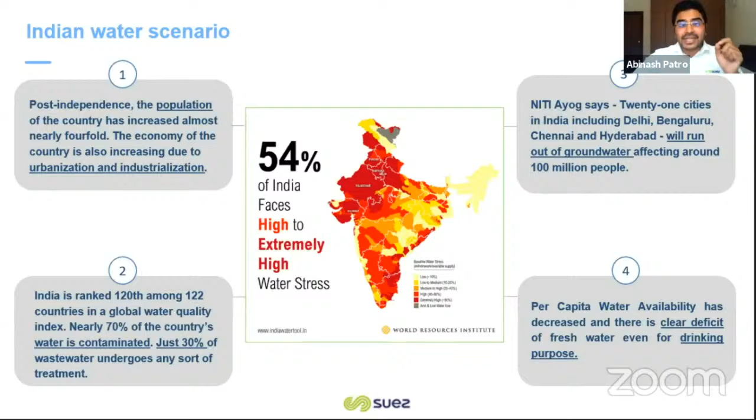Okay. And as a company, ladies and gentlemen, what we are doing. So our only and single purpose globally is to shape a sustainable environment now. We want to solve these water challenges globally. We are helping our industries, cities, and urbanization sector to solve these challenges. This is our clear purpose. How we are doing this. This is very important. From last 162 years, we have been doing this. We have been working with cities and industries. These are the three important pillars.

We are helping cities to reduce the water footprint. What we are telling, this much water is not required for the intake. So we have to reduce the fresh water intake by optimizing the process, by adopting advanced technology, by adopting digital technology. Second is, we all together have to adopt integrated water management, be it water treatment, effluent treatment, recycle, zero liquid discharge. So we all have to adopt this so that we don't take fresh water. Once only we take fresh water. Second, we have to keep on reusing this fresh water so that we save fresh water for drinking purpose.

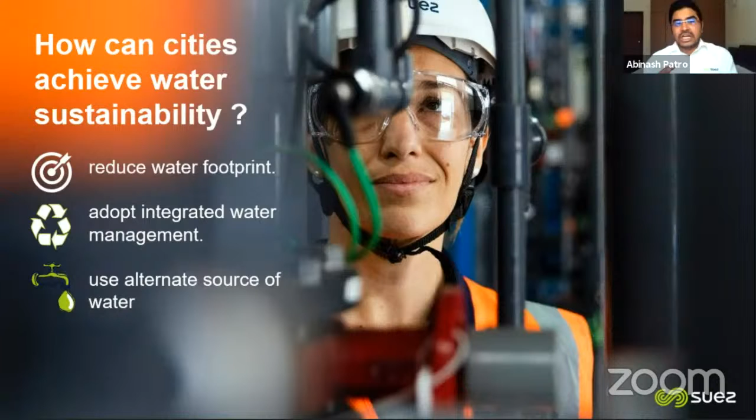And third, most important, everyone, we all have to create alternate source of water. Yes, you heard it right. We have to create alternate source of water. How? By treating and reusing sewage water, which we all generate. Second, by reusing industrial wastewater. And third is by converting seawater into fresh water. So these are the three things which we all have to do. And today we are going to discuss creating alternate source of water for all of you through decentralized sewage treatment plant. So this is very important.

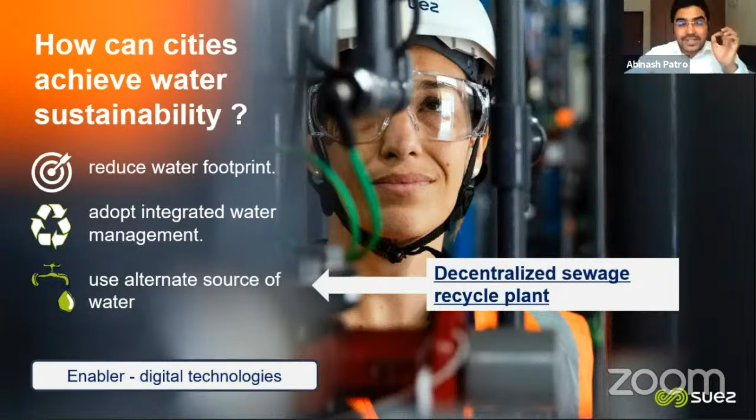And all this has to be supported by digital technology, which is going to improve the efficiency and effectiveness of the plant. As Suez, end of the day, we want every one of you to win, because when our customers win, we win. So with our expertise, with our global knowledge, with our localized skills, we want everyone to win over these water challenges.

We are a 162-year-old company, ladies and gentlemen, started in 1858 with Suez Canal inauguration, and there have been many revolutions like the hygiene and public health revolution, urban comfort revolution, and now the resource revolution. This is all about reduce, reuse, and recycle. So we as a company, a global leader in environment services, are helping to solve these resource revolution challenges.

Okay, globally, we are a group of 90,000 passionate employees working toward a single cause to solve these water challenges globally. You can see turnover more than 18 billion euro globally. And this is what we are really proud about, the trust of the customer. More than 450,000 customers globally trusted our capability, trusted our people expertise to help all of you. And more than 120 million euro in R&D we are investing so that we develop advanced technology to help all of you.

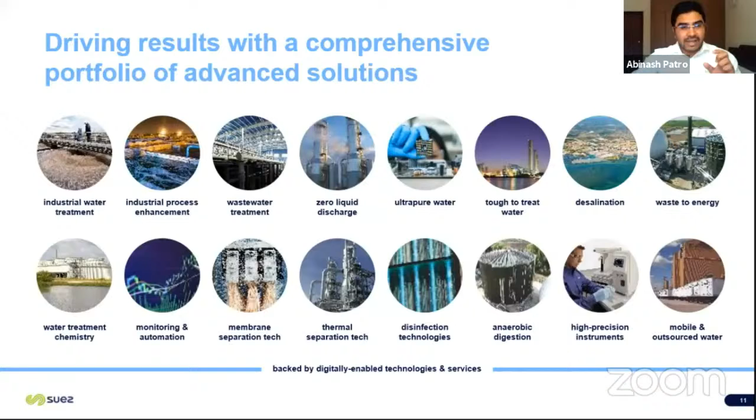So this is the range of technology. Today we are going to discuss specifically membrane bioreactor technology, but be it water treatment, zero liquid discharge for industries, for municipal corporations, we have a range of technology, but today very specifically on MBR we are going to discuss. Very important for success of any plant or any solution is this unique integrated offering. With Suez, ladies and gentlemen, we manufacture our own product. We can provide the complete solution. We manufacture our own chemicals in our factory, and we are leading globally in digital technologies also, with services and support to all our customers. So this unique integrated offering with Suez, you all will get.

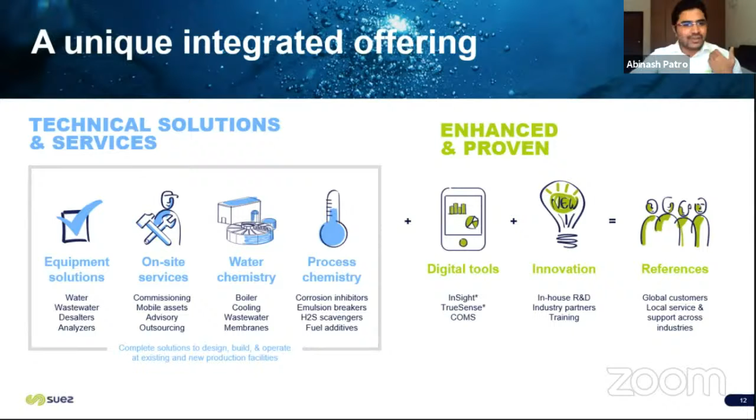So this is important. In India, we are a leader in providing water and wastewater. More than 1,500 people working from India for the last 40 years. And we have a center of excellence and engineering excellence in India, a technology center to develop some of the innovative technology, and a digital center, everything in India.

So India is a hub where we are driving all this water and treatment technology. And in line with the Make in India initiative, we have had a manufacturing facility since 2009, ladies and gentlemen, where we are manufacturing world-class reverse osmosis membranes and specialty chemicals, and all these chemicals we are also importing and exporting outside India. This is very important.

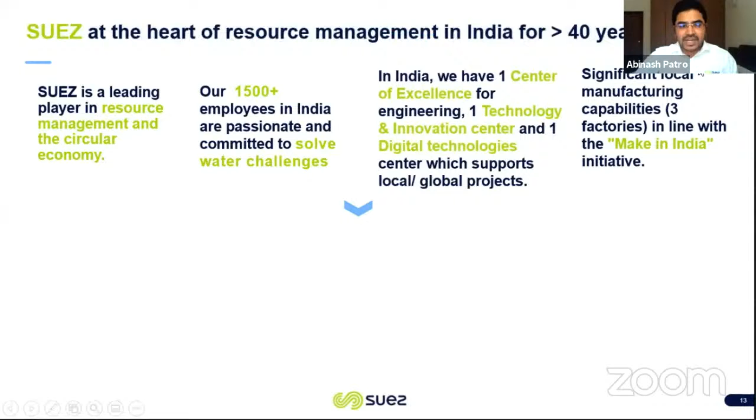So be it municipal corporations, we are connected with them, providing large sewage treatment and large water treatment plants. And today, like what we have discussed, the urban sector, like all of you, the plumbing community, the consultant community, the architect community, where we are providing sewage recycle solutions for all these sectors. And one success factor which I want to highlight here, why we are so successful in India on this sewage recycle, is because we believe in minimum and tighter reuse standards, the plant which can provide this quality of water consistently. So this is why we are more successful, and Raja is going to discuss more on this technology, how we are achieving this.

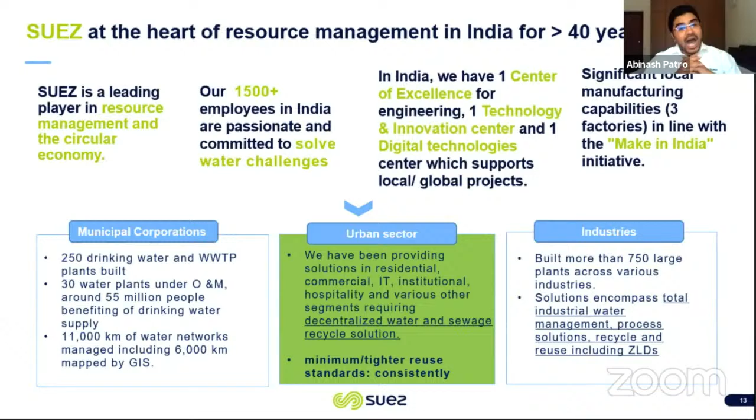And third, industry: we have more than 750 plants across industries treating tough-to-treat wastewater, and zero liquid discharge solutions. So this is, in a nutshell, ladies and gentlemen, about Suez and how we are helping all of our customers in solving these challenges.

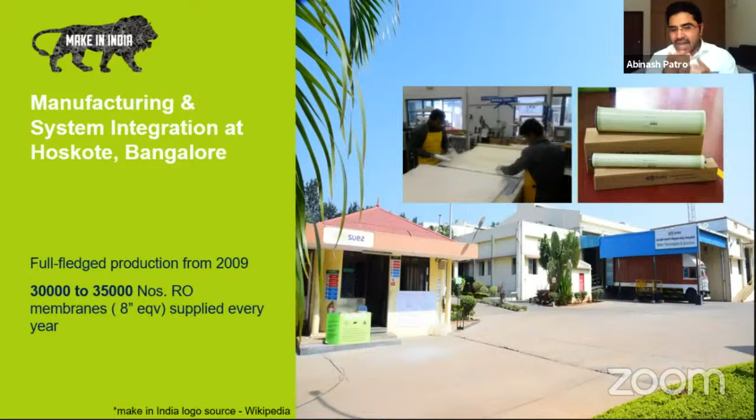Now over to my colleague, Mr. Rajasekaran, to take us through. This is the manufacturing facility which I mentioned, the Make in India plant at Hoskote. If you want to visit this plant, I welcome all of you so that you see how we are manufacturing this technology. So over to Raja to take us through this important and very innovative technology, that is membrane bioreactor. Over to Raja.

Yeah, thank you, Abinash. Thank you for your wonderful session about Suez and about recycle. So today I'm going to talk about what is meant by recycle, why we have to do that, what is the success of the recycle, what advantage we are going to get if we do that, and what Suez can offer to you all. So this is what I'm going to talk about today.

So recycle means, if you start getting consistent outlet water quality and consistent outlet flow, whatever sewage is being generated, and if you're getting it consistently, you are able to reuse it. That is what makes recycling successful in any plant.

So in India today, you can see that sewage treatment plants are available everywhere. But most of the plants are not adequately treating the entire flow which is getting generated, and they are also not generating the required water quality for reuse. Today we are going to talk about how we can help India reuse this entire sewage for reuse applications. Let's go to the next slide here.

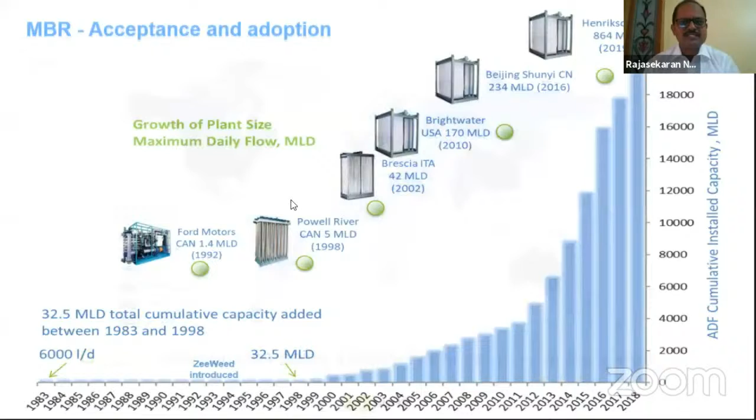So today I'm going to talk about a specific technology called MBR. MBR means membrane bioreactor. This is the most advanced technology as far as any sewage water treatment is concerned. You would have seen most of the conventional systems, but MBR is the most advanced technology system and the most reliable process. We started this MBR way back in 1983, with 6,000 liters per day, and from there the journey started.

There is a company called Zenon from Canada that actually started this first MBR, these membranes. And then slowly these MBR membranes have been adopted over a period of time, and you can see that now, in 2019 and 2020, we can talk about more than 20,000 MLD of water being treated with MBR technology and with Suez MBR membranes. So you can see how it has evolved.

So why has it evolved, why has the technology been accepted? The main reason is the reuse application: it has been consistently giving excellent water quality, and it has been proven over a period of time. It's one of the best technologies as far as any recycle plant is concerned. Let's go to the next slide here.

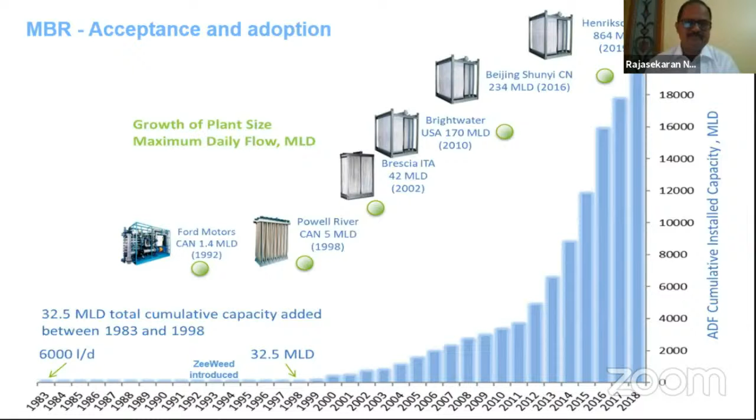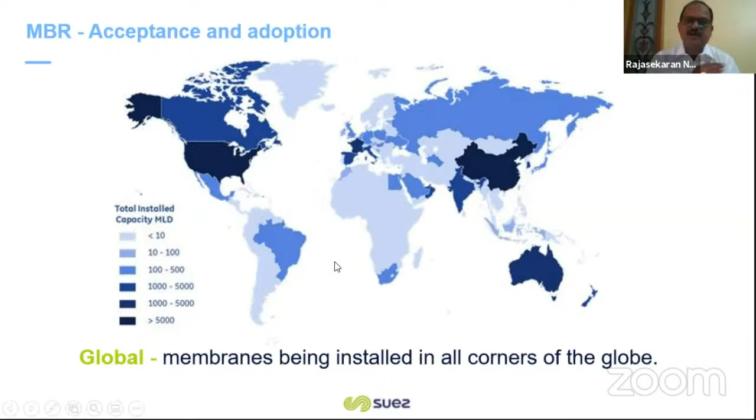What is the next? Yeah.

So now we'll talk about India operations. In India, we started our first MBR installation in 2004 at Cubbon Park, Bangalore. This is around a 1.5 MLD plant, and anybody can visit this plant and see it. The entire water has been treated and used for construction of the building, and completely used for gardening and washing, and other reuse applications.

So we started in 2004 in India. Now we have more than 800 installations across India, from 5 KLD up to 45 MLD or 50 MLD, plants which have been successfully running for the last 16 to 17 years. Moreover, the installed capacity of more than 225 MLD has been installed in India. That means across India and across various segments, this MBR technology has been adopted.

And in MBR technologies, Suez is a pioneer in making these MBR membranes, as Abinash mentioned. We have a market share of more than 70%. If somebody thinks about recycling, the best technology is MBR, and if it is MBR, then what comes to mind is Suez technology. Thanks for all your support, trust and faith in the company, and we will continue to support. This is a very beautiful product, and it's been technically proven. Every day we keep improving the product from the Suez side.

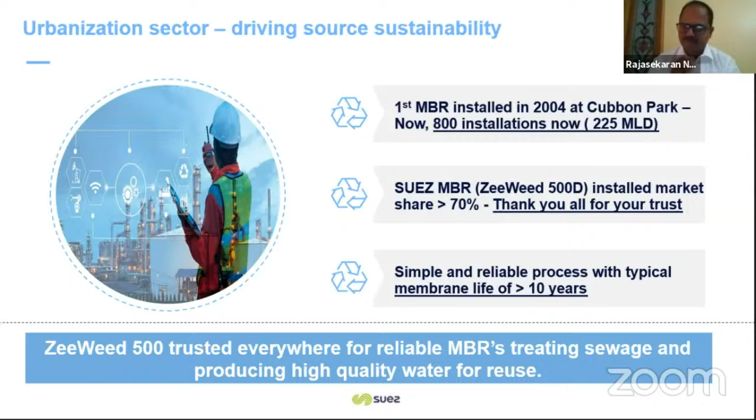Now we'll talk a little bit about the technicality, how this MBR process works, and how it is useful for reuse applications. MBR means membrane bioreactor. It is a combination of your conventional biological process and a membrane filtration process. The advantage of combining both is that you can increase the MLSS concentration up to 8,000 to 12,000 milligrams per liter, whereas in a conventional system you cannot increase it beyond 4,000 to 5,000. Otherwise, you will have a lot of issues in the settling process.

But once you do this, the membrane acts as a barrier, and you will get a consistent outlet water quality which can be completely reused for all your non-potable applications. Except drinking and bathing, this water can be completely used. It's a very simple process. Once you take out the clear water, the rest of the water goes back to your bioreactor tank. And not only in the STP segment, but in effluent treatment plants also, in most places we have utilized the same technology.

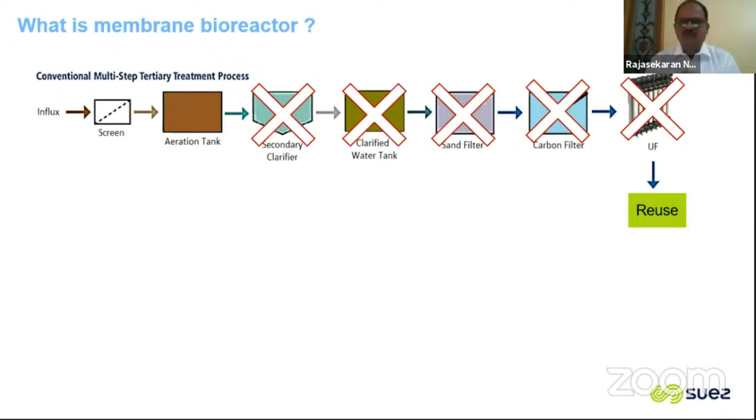A small way of explaining the conventional process versus the MBR process. In the conventional process, you have a screen, aeration process, secondary clarifier, then the clarifier water tank, then sand filter, carbon filter, and ultrafiltration to get reuse water quality. But with MBR, we don't require the secondary clarifier, the clarifier water tank, sand filter, carbon filter, nothing. You can remove your ultrafiltration also. You only use the aeration process and then your membrane tank. The membrane can be fitted into the same aeration tank, or kept in a separate membrane tank.

So you can just see this process itself, how many processes we have eliminated, which is not only adding the cost, but also contributing a lot of space, right? And also during the operation we have to maintain all the equipment, right? But whereas when it comes to the MBR, it's a very simple, reliable process, and more than that, you will get consistently high water quality.

What we have seen in most of the places, more than 800 plants right now, in the entire 800 plants, 99.99% of the time you get less than 5 ppm BOD. Whereas in the conventional process, it all depends on the operator, how the operator is operating the plant. If an excellent, technically skilled operator does it, then they will get the parameter. Otherwise, sometimes the parameter goes more than the limit.

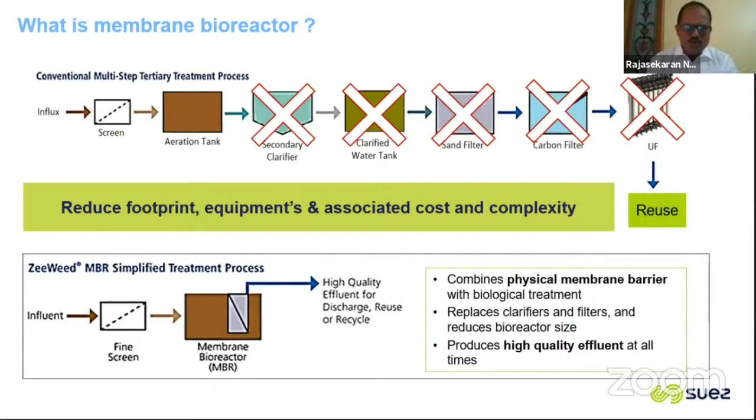Whereas as far as the MBR process is concerned, at any point of time, that's what I talked about, it acts as a barrier. It's like a jail, actually. The TSS or turbidity or the bad water quality will not come out of your membranes. It controls everything. Okay, so this has been proven. We can see how this process has been done.

For the pre-treatment, we require a bar screen and oil skimmer, then equalization tank, then fine screen. The fine screen is one thing we normally recommend, especially because human hair or a blade or some sharp-edged material can come and cut the membrane. So ideally a 2 mm punch hole fine screen is required. And then after that, it comes to the biological process.

The biological process is a combination of your anoxic and aerobic process. Anoxic removes the complete nitrogen from your sewage water, and the aerobic process removes all the BOD, COD, all the organic particles from the system. Then it goes to membrane filtration. The membranes suck only the clear water, and the excess dirty water stays in the same biological process, so that you get only the clear water.

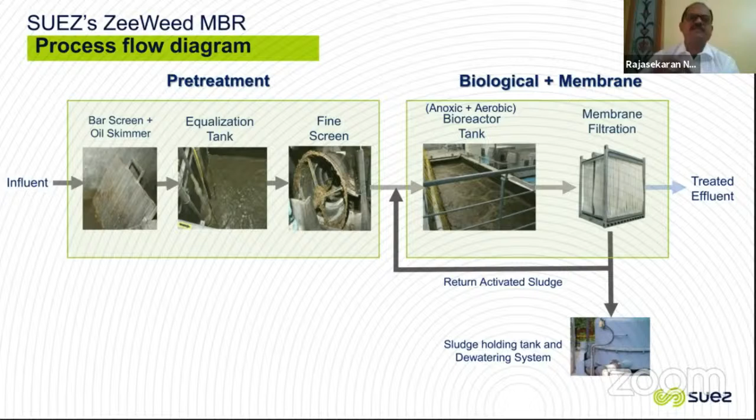And one of the biggest advantages of this process is that you will get a recovery of more than 99% of the water. For example, if you feed 100 KLD of water, you will get 99 KLD of treated water. Only 1% goes to waste, probably to the sludge handling system or something. But otherwise, these systems have a recovery of more than 99%. That is fantastic when compared to conventional at 90% or 85%. What is the next one?

Yeah. So now, especially with the urbanization we talked about, right? In urbanization, space becomes very, very critical. Be it your residential complex, your hospital, the hotel industry, or even the IT industries. Day by day, the cost of land goes up like anything. But at the same time, as a water treatment company, a technology product, we have to save space for the customers, right?

So that means any existing conventional system can easily be retrofitted to up to 3x capacity. For example, in India, a 300 KLD STP plant we have converted to a 1 MLD plant, that means a 1000 KLD plant. That means the capacity has been increased 3 times. In some cases it's been increased up to four times. So this is fantastic as far as recycle applications are concerned.

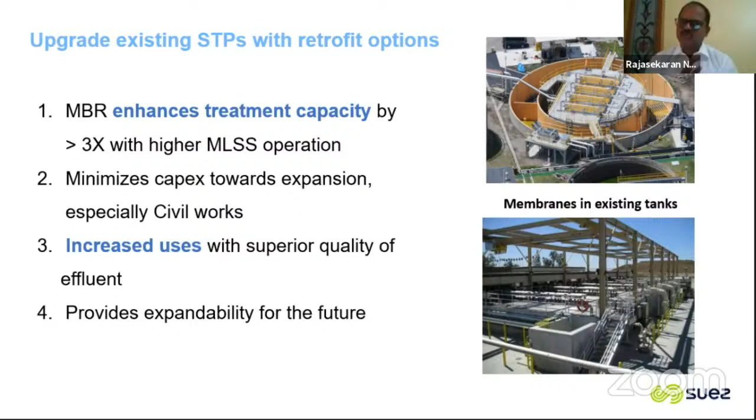And when you increase the capacity, you don't need to increase your civil cost. So that means overall capex can be reduced, and also high water quality, so that the entire water will be reused for complete applications. So that's what I talk about. This is one of the best technologies for sewage treatment applications available in the world right now. And in MBR, Suez leads with more than 70% of the market.

So now we can talk about what outlet water quality we can get. Normally we go with either PCB norms or NGT norms, right? The NGT norm says BOD less than 10 ppm, whereas our MBR can produce less than 5 ppm. That means this is much better than the government norms. Not only BOD, COD 50 versus 30 will be provided, and TSS less than 2, 99.9% of the time our MBR produces.

And total nitrogen, phosphorus, take any parameter, MBR produces very high quality water. And this water can be absolutely used for your car wash, cooling tower makeup, your fire hydrant, and even gardening or toilet flushing. Everywhere the MBR is installed, 100% of the water is being utilized across India. Okay.

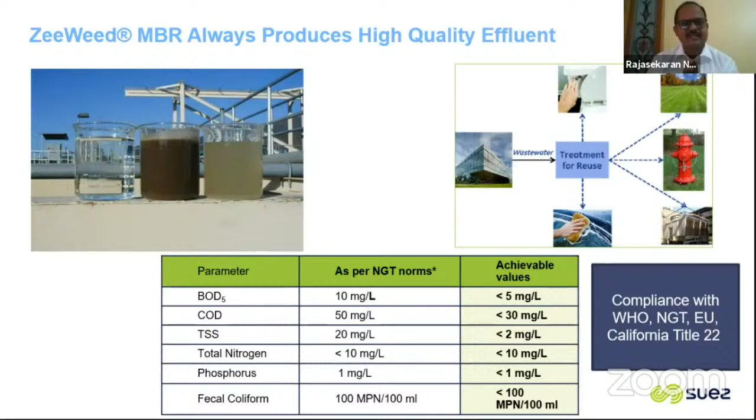Okay. Now, why Suez MBR? I talked about more than 70% of the market share, right? So Suez makes patented reinforced fiber. This is our own patent. It's not only the fiber but also the potting technology. This is very important in terms of performance, the life of the membrane, and also the water quality. And we also use one of the best chemistries called PVDF, polyvinylidene fluoride chemistry. This is the best polymer available in the world to make MBR fibers.

And also we use the out-to-in technology, so that the membrane will not get fouled, and it can operate in a wide range of pH, from 1 pH up to 10 pH. And the nominal pore size is 0.04 micron. What does 0.04 micron mean? It removes all bacteria, virus, turbidity, and protozoa completely. So it's virus-free water. Without any further treatment, this water can be used for all non-potable applications except bathing and drinking.

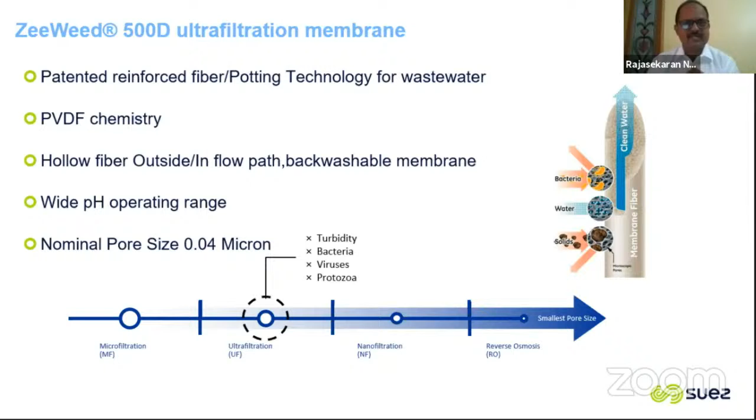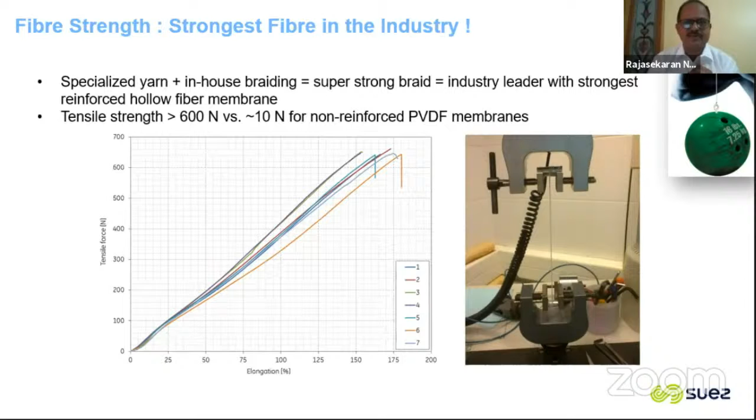What's the next one? This fiber is one of the strongest fibers. We make this fiber in Hungary, in Europe, and our factory is the world's biggest factory manufacturing hollow fiber membranes. And the strength we talk about is one of the best in the industry. It can handle more than 600 newtons versus conventional non-reinforced PVDF of 10.

And now we'll talk about the new introduction. Around 2 to 3 years ago, we introduced a new model called 500S. In other words, we call it 500 ZeeBlok membranes. Earlier, 3 years ago, if you came and asked Suez, can I go for a 10 KLD plant, at that time we didn't have a solution. But now we have a solution for any STP, starting from 5 KLD onwards.

And this is one of the simplest forms of membranes. You can keep it in the same aeration tank and start sucking the water. And overall, the capex cost comes down, and the height is reduced from 8 meters to 5 meters. This membrane will be used starting from 5 KLD, because most of our residential complexes or hotels come under less than 300 KLD flow. This membrane absolutely fits in, especially in the basement.

So earlier we talked about the height requirement for any MBR membranes being 8 meters, and with the introduction of our new model 500S ZeeBlok membrane, we require only 5 meters. So now any building, as for any STPs, requires a minimum of 5 meters. So within the minimum of 5 meters, now we can easily retrofit with our MBR systems also. Okay, go to the next one, Avinash.

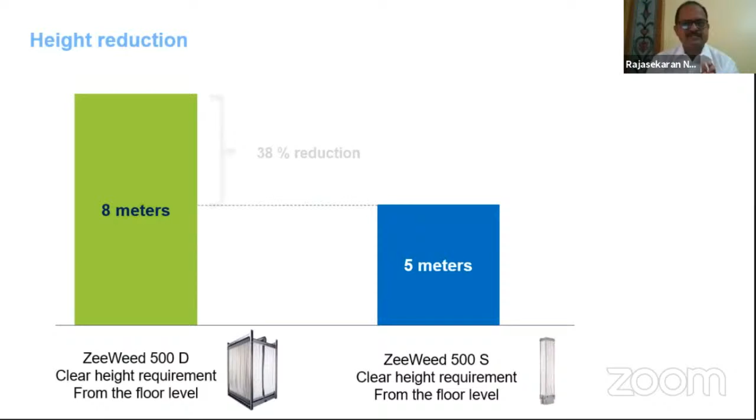So if you talk about 8 meters versus 5 meters, we have reduced almost 38% of the height requirement. Earlier we used to request customers to give two floors of height and all that, but right now we require only one floor height. Normally any STP, even a conventional system or MBBR or SBR system, requires 5 meters of height. Within the 5 meter height, our 500S can easily be installed, and it can easily take out the clear water from the same aeration tank.

So it removes most of the complexities; lifting arrangement, hanging arrangement, chain pulley, crane, all that is not required. And moreover, one of the biggest advantages of this membrane is that the membrane weight is very low, 45 kg only. Any two people can easily lift it from the aeration tank, clean it, and put it back. In terms of operation also, this gives us a lot of advantage in handling these membranes. What's the next one? Yeah.

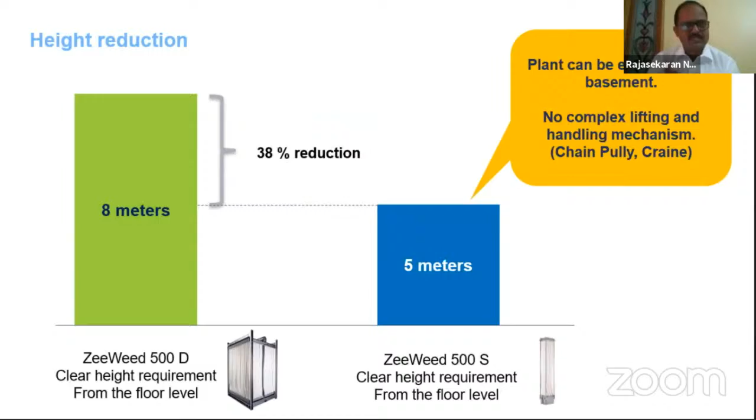So these are some of the advantages which I talked about. This is for flows starting from 5 KLD to 300 KLD. This is a very good option available with Suez. It's simplified operation. It is easily accessible to anyone. And one more important point is that earlier people said MBR means a very complex system, where only skilled manpower is required to operate. But now it is not.

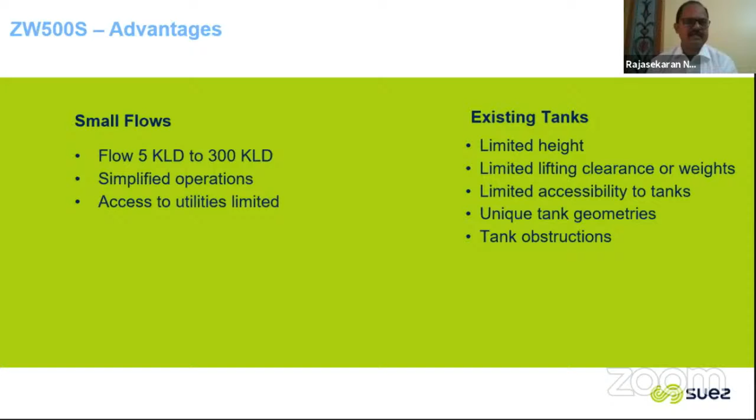Absolutely not. I would say that within the same aeration tank, we can keep this membrane and start sucking without any complex operation. Just a start button and stop button. We can easily start operating these MBRs, especially with the 500S membranes. So overall the complexity has been reduced, and now anyone can operate. The person who can operate the conventional system can easily operate MBR systems as well.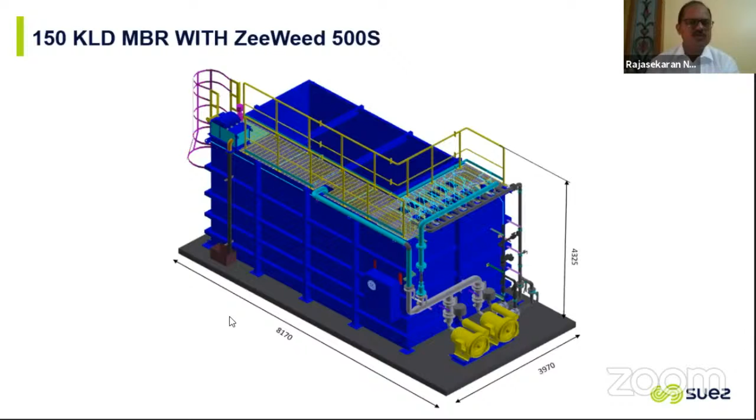For example, somebody stays in maybe a 200-apartment complex; they require a 150 KLD plant. So this will come in 8 by 4 meters only, apart from your collection tank and treated water tank. So you can imagine how much space can be saved, whereas a normal conventional system may require 3 to 4 times the space. So this is the biggest advantage.

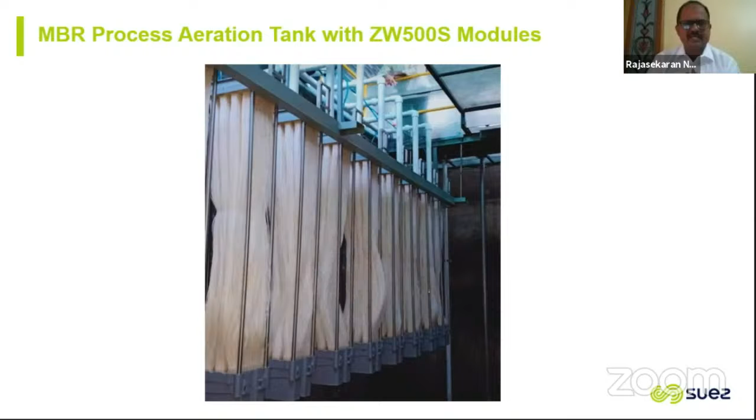So these are the membranes we have installed in some of the plants. These are the actual live membrane modules. It is only 1.8 meters in height. So you can just directly keep it in the aeration tank and start sucking. To the next one. Yeah. So these are some more photographs, showing how this membrane is a simplified version.

So one is the permeate pipeline, and another one is the airline. The membranes continuously suck the water, and sometimes you need to clean the membrane, so the airline option is given. Only 2 lines. Even if you want to remove one membrane to clean it, a tapping arrangement is given. On the left hand side you can see one membrane; you can close the tap, remove it, clean it and put it back. So during cleaning of the membrane, your operation will not be stopped.

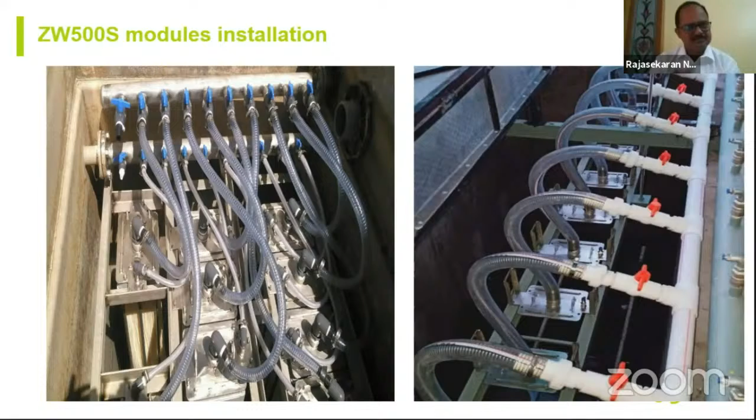For example, if you have 10 membranes, as on the left hand side, and you want to remove one membrane, you can remove just that one, clean it, and put it back into the system. What's the next one? This is one of the plants of 1.1 MLD we installed in Hyderabad.

So this is how compact it is. Skid mounted systems also we do for our customers. On the right hand side, one cassette, we call it ZeeWeed 500D. It can produce up to 1.1 to 1.5 MLD of flow with only one cassette. Just imagine a 2 by 3 meter tank size which can suck almost 1.5 MLD of water. How compact it is, right? Okay, so this is the solution Suez brings to the table.

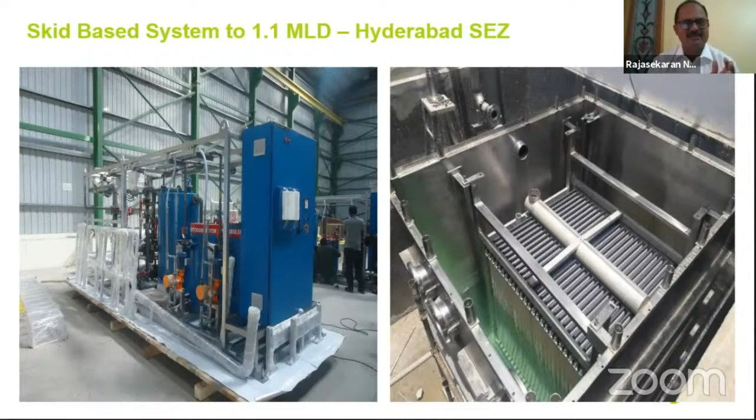And the most important point is that today everyone talks about pandemic conditions and virus everywhere, right? Coronavirus and all that. Okay, so now we have this membrane. It has 0.04 micron size. It can remove 99.9% of the virus. That means including your coronavirus, all the virus can be removed by these membranes. Virus starts from 0.1 micron onwards, whereas our membrane pore size is 0.04. That means it removes 99.9% of bacteria, virus, protozoa, everything from the sewage water.

That means the treated water can be absolutely reused for toilet flushing. When you flush the toilet, if you are using the STP treated water, you need not worry if you have this MBR in place. Otherwise, in the conventional system, normally you will be worried whether bacteria will come in this flushing water or not. But our product line completely eliminates 100% of the bacteria from your treated water.

So that's all from my side. You can reach out to us for any questions, any clarification. We will help you in terms of designing the STP plant and saving your space, or in terms of giving the water quality, and all that.

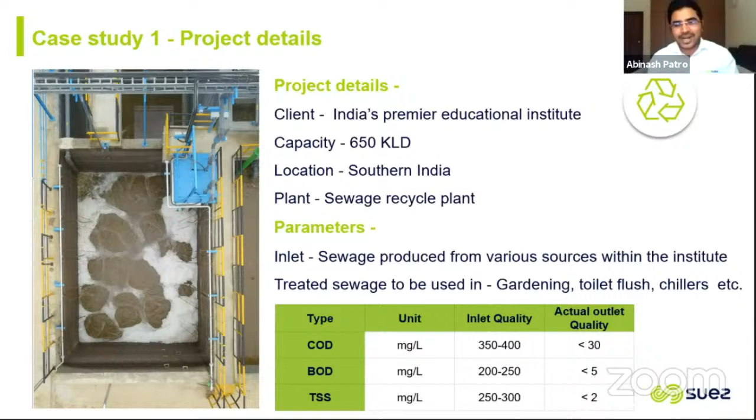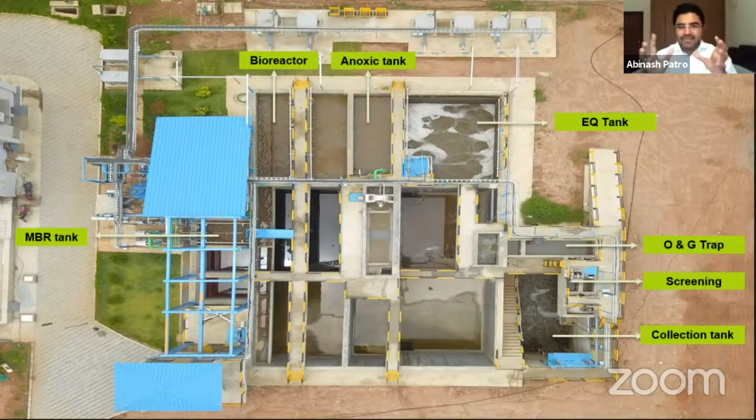I met the director of IIT Hyderabad last time, and this is an aerial photo we have taken. You can see how compact the plant is. This plant can be expanded in future by 650 KLD more. The chlorine, the collection tank, the screening, the oil and grease trap, equalization tank, anoxic tank, bioreactor, and the MBR tank. Very compact, and it has really saved space, the footprint of IIT Hyderabad.

You can see the MBR, the quality of the plant, how it is designed. And IIT being a premier institute, they were very precise on the quality of technology and the quality of each and every component of the plant.

And this is how the MBR technology has been adopted by IIT Hyderabad. So this is very important, ladies and gentlemen, again, very close to my heart. When I discussed with the director of IIT Hyderabad why they have adopted MBR technology, I'm going to read what he has told. This is his words.

One of the strong reasons why we wanted this kind of technology is many times we observe that gardeners, while watering the plant, consume the water for drinking, or maybe for washing the face, because the gardeners don't know whether this water is coming from a sewage recycle plant or a fresh water source. Sometimes they consume the water. We wanted to take extreme care that they should not suffer.

And that is the key reason, ladies and gentlemen, why IIT Hyderabad has gone to this treatment technology, that is MBR, because they are sure with this technology they are going to get consistent, high quality water, which can be reused consistently. So this is a very strong point, and this tells us how this technology is safe and how it is giving high quality water. So this is the first case study on IIT Hyderabad, educational institutes, how they are recycling sewage and reusing it there. So this is a zero liquid discharge campus, IIT Hyderabad.

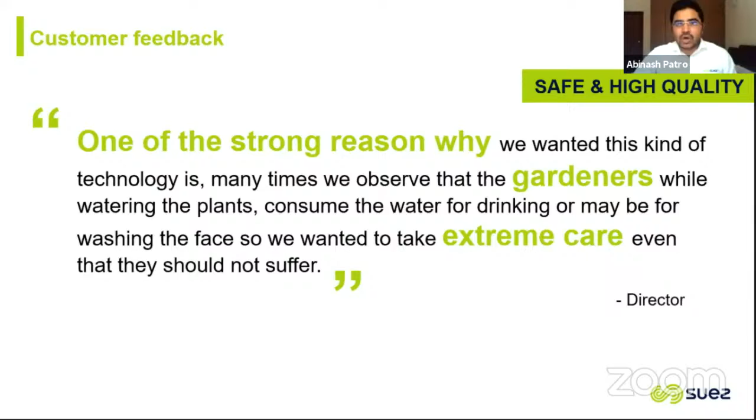Second, we will go to one of the key projects which Suez is doing. This is for a group called Lodha, one of the premier real estate developers in India. And Lodha has developed a city, a township near Mumbai, that is Palava city. And there are various sewage treatment plants. We have supplied around 20 MLD, around 9 plants.

Lodha wanted, again, this is very important. The driver of Lodha: they never wanted to use fresh water for gardening or toilet flushing or cleaning application. They wanted to reduce the fresh water intake. Again, I'm repeating, they wanted to reduce the fresh water intake so that we can use that water in drinking. And we have supplied, again, the same membrane bioreactor technology to Lodha group.

And when I met the CEO of Lodha, Mr. Shaishav Dharia, he told, Abinash, because of this plant, we have reduced 50% of our fresh water intake. And currently, they are reusing every drop of recycled water from MBR technology. Also, as a CSR activity, they are giving this treated water to nearby chemical and pharma industry. So this is really great work by Lodha Group, how they are reusing this wastewater, because of consistent high quality technology. So this is one more case study for Lodha Group.

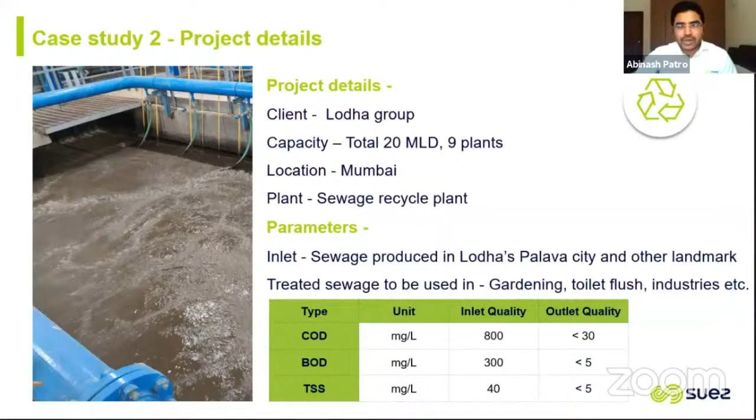Similarly, ladies and gentlemen, we have supplied various plants across the urban sector, be it IT sector, residential sector, commercial sector, be it malls. So we have the references and all our plants are working fine. So we are now coming to the end of the presentation, and as I told you, there is a bonus which is waiting for all of you in the end.

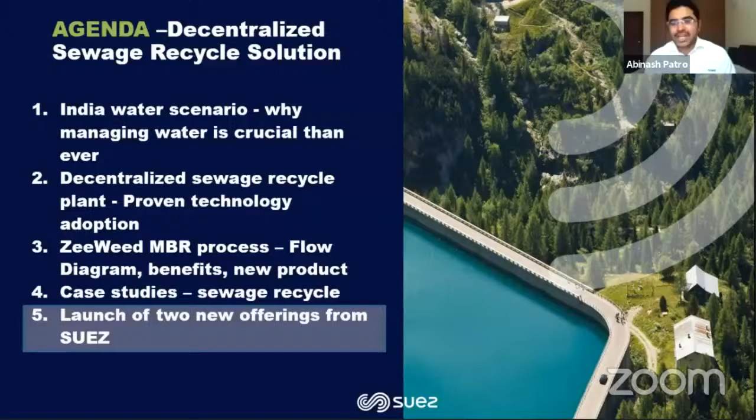So these are the two new offerings launched by Suez recently. The first one is, we all have worked together and we have come out with a white paper. So this is how Suez, as a company with international experience and local capability, can help India address the water challenges. These are some of the key policy recommendations we have developed to promote water reuse and recycle. This white paper is available for all of you.

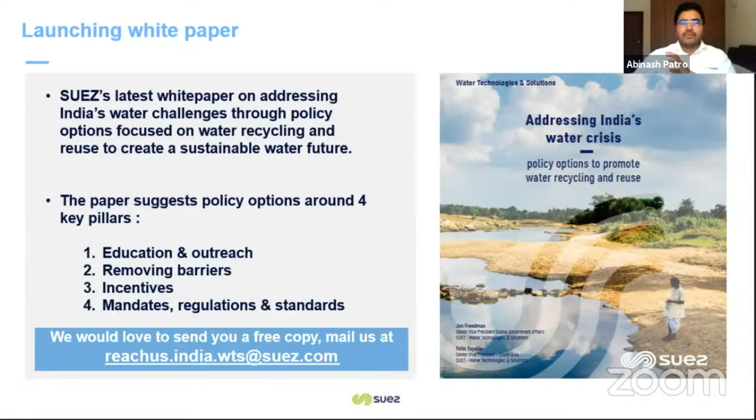Second, one of the very important ones, this is a new offering which we have developed and launched recently. We call it IND Sentinel. Again, this is a result of some of our customers, some of our industrial customers, urban sector customers.

They know that we are experts in sewage, in wastewater, and they have got information that COVID-19 is present in wastewater, and we can test sewage water and tell them whether the COVID-19 virus is present in their society, in their office complex, or in their premises or not. So we have developed this new offering, ladies and gentlemen, called IND Sentinel. This is a reliable and early indicator of potential COVID-19 presence in a community or in your company using one of the advanced technologies, that is RT-PCR technology.

So the three benefits: you can identify early whether your society is COVID affected or not, early identification. Second, this is fast and reliable, and this is highly sensitive. Even one infected person out of a community of over 1,000 can be detected. So again, this is a new offering, very much cost effective. So if you want to know whether your society is COVID free or your office is COVID free or not, connect with us. We can do the testing and give you the results and how safe you are. So this is the COVID-19 testing, the IND Sentinel.

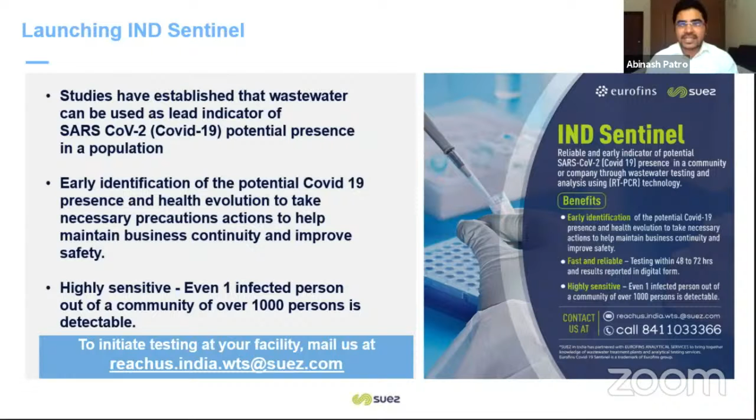So now we are coming to the end of the presentation. What we have discussed today, ladies and gentlemen, is very important, very crucial, about wastewater reuse. And we need all your support in driving this wastewater reuse in India, in the urban sector. And I'm sure you all are doing it, but let's move one level up in driving this wastewater reuse and solve these water challenges. So this is a short presentation from Suez to all of you.

And as Plumb Skills said, one of the key events we are currently doing, and this is what I was thinking this morning: when we say plumbing, when we say a society we are building, I think sewage recycling is also an integral part of this Plumb Skill event. This is not something separate. Water and wastewater is not a separate topic to discuss. This is an integral part, and we want to partner with you so that we can develop the skill sets, give you training on how we can do dual plumbing, how we can decrease the footprint of wastewater, how we can use every drop of wastewater and reuse it.

So please consider that wastewater recycling, sewage recycling is a part of your job, and partner with us and give us an opportunity to work with you to solve these important challenges. So this, in a nutshell, is our presentation.

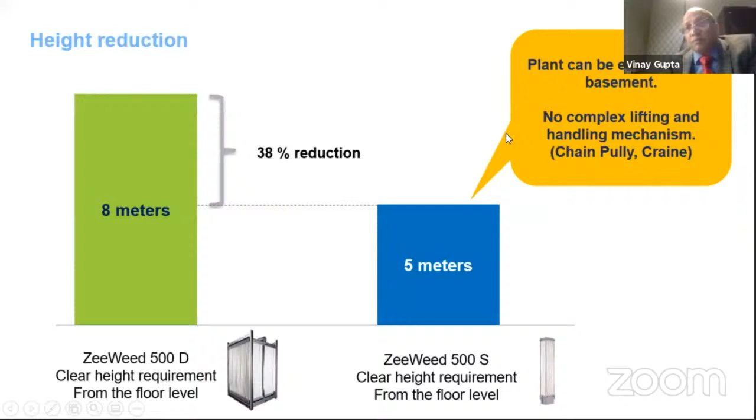Sure. And one more thing, I don't know what plants they were. In Australia, maybe 10 years back, they had small plants even for residences. I don't know whether they were MBR based plants. There's a huge market here, because now people with farmhouses, big houses, if something can be developed for smaller size, cost effective, the market is going to explode. Everyone is sensitive to water usage, and people are going to be too happy to install small plants. And that is one thing.

Third, as far as IPSC is concerned, it's not only plumbers, we're talking about the whole ecosystem: pump people, your plant, STP, ETP, even manufacturing plants. Then we also have another vertical where we are training marketing people, sales people. And the people we are training are exactly your target audience. The people selling plumbing products also visit the large builders and every plumbing consultant. So let your course be also a part of that course.

We have been given a grant by the NULM, and we are training at the moment 950 women salespeople across the country, from Srinagar to Kanyakumari. You have to give us one trainer, and we already have the ecosystem in place. Your guys can train the trainers, give them a sales course, how to sell this product, basic knowledge, and around 50 hours could be good enough. We want to give them a general training first, a little bit of everything. Then an advanced course for people selling ETP plants or your MBR plants, another 200 hours, and they can be employed in the industry.

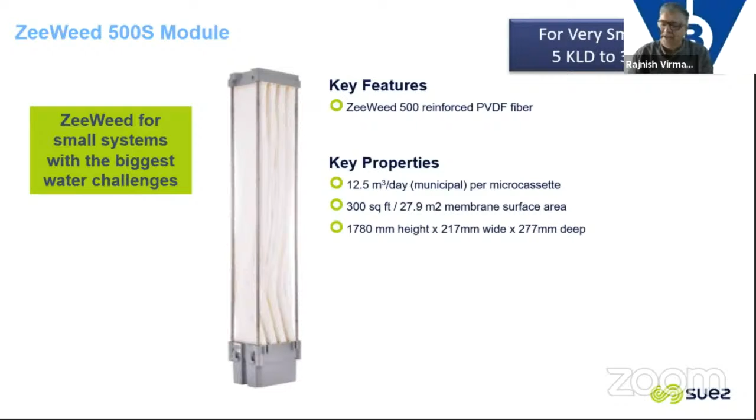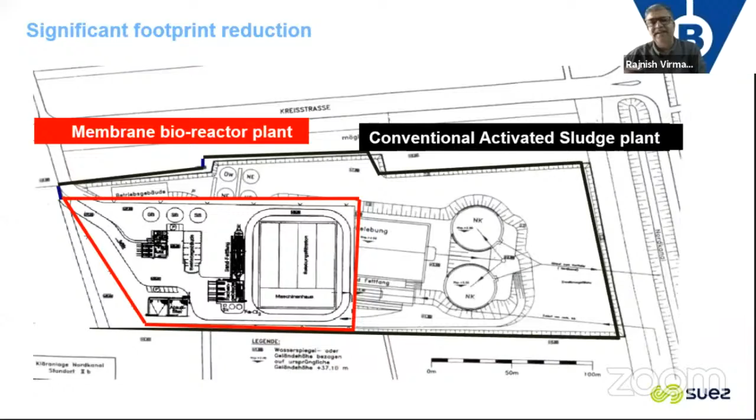Thank you, Raja. And our co-chairman, Mr. Vinay Gupta, though his picture is coming in a box on my computer, we all know in IPSC he always thinks out of the box. What he has just said, impromptu, he has offered you, the Suez team, to join for this technical and marketing skill set support. In your presentation, you showed the journey from trade to resource revolution for Suez. Now, what Vinay has suggested is a journey which he, along with our chairman and stalwarts like Mr. Kabra, started 10 years back.

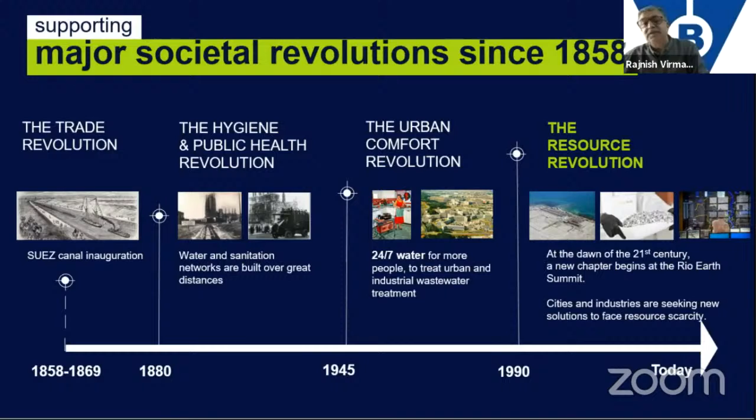I'm very new, very naive, I would say. But after 10 years, he is now showing us the path, a journey from skilling to creating entrepreneurs. So that is where we will need you guys.